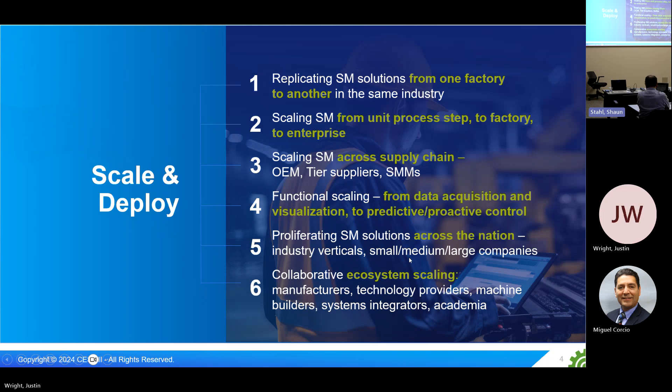So I'm going to repeat this slide because it's important to set context for the rest of the discussion. When we said we're going from CESMII 1.0 to 2.0, we said we're going to be focusing on scaling and deploying. So I'm just repeating what that means here. The one that is important here for this particular conversation is number one, of course. Perhaps number two, this is less of a supply chain - that's actually the next session. It could include functional scaling, proliferating the solution across the nation, and of course always the ecosystem scaling. So a lot of points that apply to this particular sector.

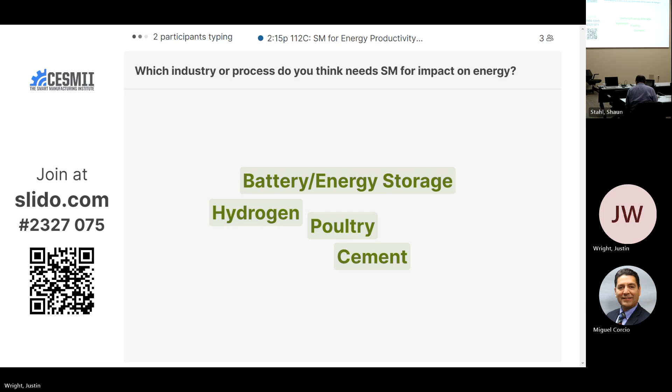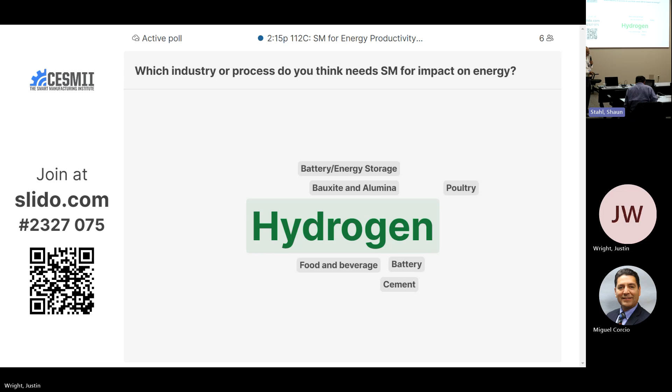Did everybody answer cement? There you go. That's good. That's a new one, poultry. Yeah. Bauxite and alumina, close to my heart. Okay, that's good. Good to know, good to know. And this will be open, so if you think of something later on, you can just add to it. So thank you for that.

So what I'm going to do is go through some examples. I've got maybe ten examples. I won't spend a lot of detailed time on it, but at least give you a flavor for what these projects were, what impact they had in the respective industries. And then hopefully that will give you some idea of how we've been able to use smart manufacturing in these use cases.

So this is a use case in, you could call it, oil and gas. We had project partners from Texas A&M, and then back then it was called Praxair, it's now Linde. They were the partners. We had Siemens as another partner, and other folks as technology providers that came together. The idea here was that the air separation unit is a fairly common piece of equipment in that industry, and a small percentage change in how you operate it results in a huge impact on energy consumption. And so what they did is come up with a strategy where they were using digital twins that were fairly high fidelity.

And then from there they extracted surrogate modeling that could actually execute in real time. Because when you talk about real-time operations, you can't wait for hours for a model to provide results. So they created a bunch of dynamic models, and out of the steady state models, they had real-time applications that were created, and worked in conjunction with real-time access to data from our partners at Siemens. They had a data pipeline that fed through, to compare what the real-time process is telling you versus what they were predicting, and that was tied together for them.

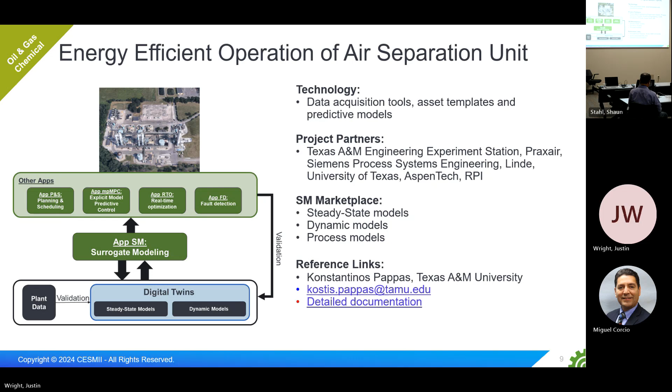I just wanted to add to the next example that you had in there. One of the challenges we had also was that in many instances, you cannot collect data because of the expensive instrumentation that you have to put into the different places. So that was one of the targets here. It wasn't really just get to the energy losses and reduce it, but it was also do it very inexpensively without spending a lot of money just instrumenting all your equipment. So that was the other challenge that we had in this case.

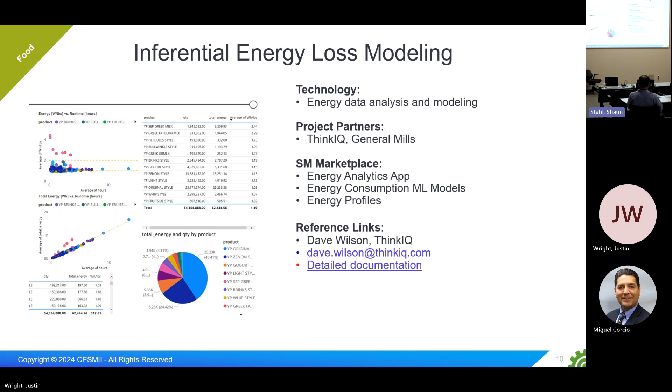Okay, this is another industry. So this was aerospace and pharma, but it deals with traditional subtractive manufacturing, which is basically machining, and additive manufacturing. So this facility at UConn, and the partners were Johnson & Johnson and Raytheon and CCAT.

And here they took an approach that was at a systems level. And they said, here's a flow path of equipment that you have, which has both additive manufacturing and subtractive manufacturing. And then as you route your products through it, how do you then come up with a systems level model that says, in order for me to optimize energy usage on this particular product flow path, how do I do that? So they took a systems approach here.

But as part of that, they did develop things like tool wear estimation models. So as you're doing the machining, now it's able to predict when the tool is going to go out of commission. And then based on the data that they have from these partners, they also created a model that would predict the probability of generating scrap, which, probability of generating scrap doesn't sound good, but it's really quantifying how much of a quality issue you might have.

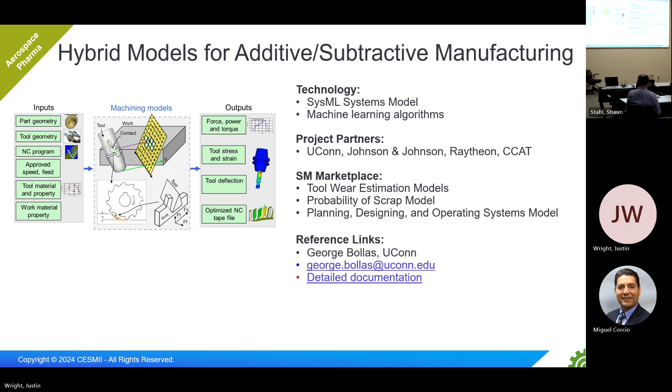Steel is a big energy user, as you know, and in this case Arcelor Mittal, now Cleveland-Cliffs, made a proposal with their partners at RPI, Purdue, and Missouri University of Science and Technology.

The main theme for this project was to be able to predict the quality at the end of the hot rolling process based on what you're doing in the continuous casting process.

If you're familiar with how steel is made, the very first step is where molten metal comes in through these segments and cools down, creating a slab at the end of the process. But it's very critical to understand where the solidification occurs, and that's a function of many operating parameters. There's no in situ measurement that tells you where that solidification occurs.

So Missouri Science and Technology created a displacement sensor that could be mounted underneath one of these segments, and they also came up with a strain sensor that could operate in that environment. Between the displacement and the strain, you could actually predict exactly where the solidification is occurring. They tested that at their site and were happy with the results.

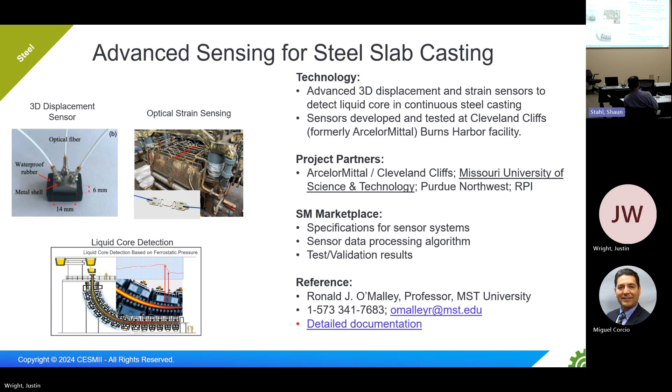Related to that project, Purdue worked on a continuous caster digital twin. The idea here was to get a digital twin that was based on physics, but then matched with real-time data coming from the floor.

They didn't quite finish that second part because of some challenges we had at the manufacturing facility. But nevertheless, this continuous casting digital twin is now actually available, and that was given to Cleveland Cliffs for their maintenance personnel to use.

As part of that, we also asked them to create the information model that would become a profile that goes into our platform marketplace.

This particular twin isn't something available through the platform because of the intensity of the computations, but Purdue, as a partner, is making that available to CESMII members through us.

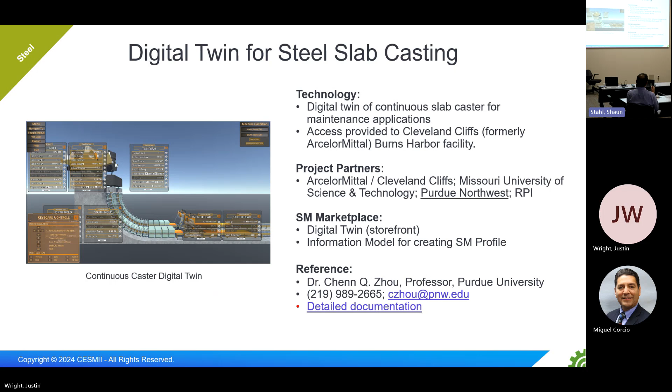The last piece is the clogging predictor, for those of you who have exposure to this. When you have molten metal operations, as the metal flows into the cast, if something happens to the nozzles and orifices that send the metal down to the chambers and it gets clogged, it's a huge deal - it freezes everything up, and the cleanup could cost you anywhere from half a day to two days. Production stops.

There's a huge deal in terms of the downtime, so being able to predict this through machine learning approaches was one of the things this team did. They have a machine learning based clogging detection algorithm using real-time signals from the casting operations, able to predict when it's pretty close to getting clogged. It flags the operator, who can either change the settings or go do something to fix it.

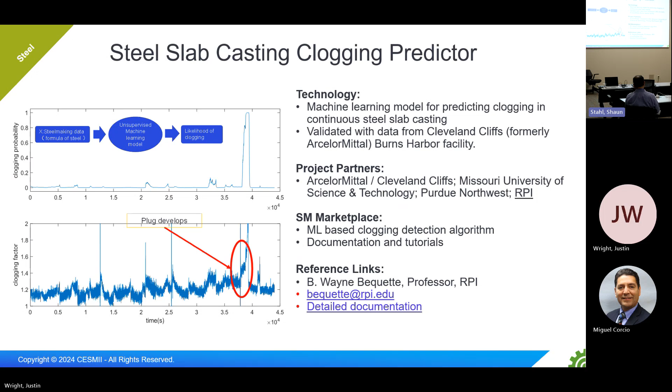So those are the steel examples. Here's the cement example - University of Louisville. Any questions so far on the ones that I presented?

The problem here was that the kiln represents about 60 to 65% of the energy used in cement production. So it's a huge deal if you can change that - if you can cut down by 10%, that's a huge deal. Every cement manufacturer has this.

What they did is they created an almost industrial size kiln, and then they instrumented it. They developed both data-driven and physics-based models for it, and then tied it back into an advanced control strategy.

So you could go from sensing to machine learning models to predictive, physics-based models to an advanced control system. They took that entire package to Argos, which was the industrial partner, and then they ran it at their facility in what's called a shadow mode, meaning this system was running in the background, providing advice to the operators as to what should be done to optimize. In the end, the operators still had to say yes, I accept this or not, which is a good strategy. But they were very happy with it.

So what they've decided now as an extension is that instead of just the kiln, they've now gone upstream and included the pre-calcination process to get even additional benefits in energy conservation.

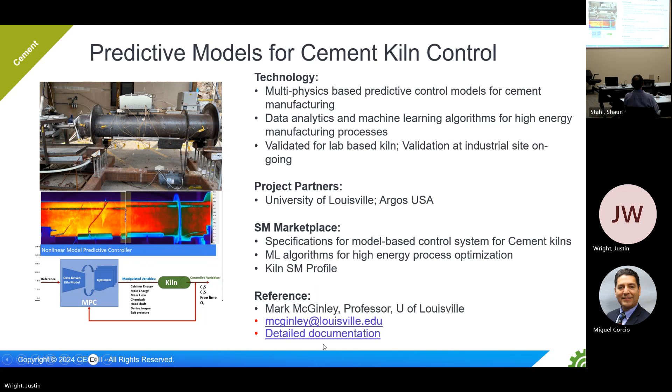Somebody was asking me about, oh David, you were asking me the question about McGinley. So that's cement. This is aerospace and composites.

So Virginia Tech, Penn State, and Honeywell partnered in creating real-time in-process data monitoring for their operations, and again this was machine learning-based algorithms.

The process was chemical vapor infiltration, and that's a pretty advanced process. You don't have a lot of in situ measurements, and to optimize the thermal operations and the furnaces to get to the quality is a challenge.

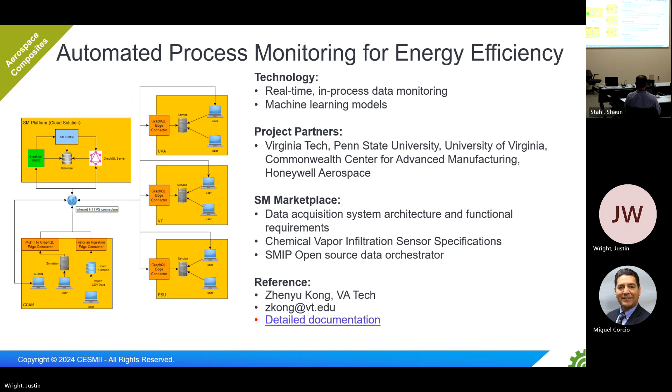So they were able to create a monitoring system. They were able to get the data architecture necessary to capture that data and then create the machine learning models from it. So, another industry example.

This is on CNC grinding. One doesn't think that it's a high intensity energy industry, but these are, I think the size of this, Miguel, remind me, I think it's maybe 2 meters in diameter or something like that.

It's really huge, and to go through the grinding process for some of these large components is an industry sector that's of interest. So here again, they created a hybrid model, with physics-based approaches as well as data-driven approaches, combined into a dynamic control strategy, and then predictive models available for us, physics-based models available for us, and obviously a profile created for the grinding process, made available for other members.

You're also looking at the other end of this as near net shape manufacturing for large products like this. So the machining of that is limited there because you're creating near net shape. What are the lessons learned from that that can be used for near net shape? So you should talk to Nick Nelena to see whether he needs any of these, that it can work for him, and there's a potential for it.

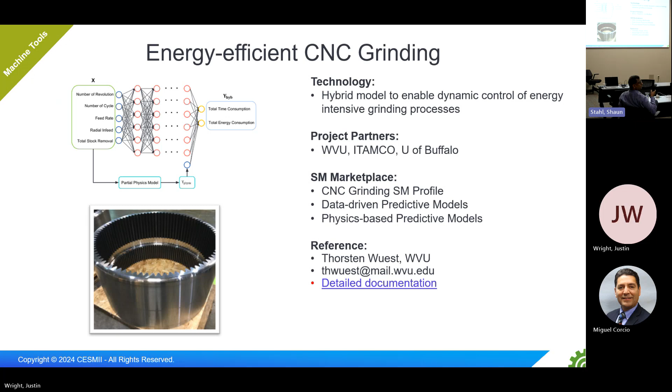This is again Honeywell as our partner with Virginia Tech. This is another phase of the project where they looked at how, actually one of the unique ones here was that when you have discrete parts being processed in thermal operations, it's important to know how these parts are placed in the furnace and what is the optimal location for that. So if you're in the aerospace industry, this is a common challenge.

And so they came up with algorithms to optimize the location of these parts as they're being processed so that the quality remains the same, but you end up using less energy in the thermal processes. So there's a part loading optimization piece of it, load placement. And then even for the thermal operations, what are the optimal operating set points for creating the required quality. So, another example there.

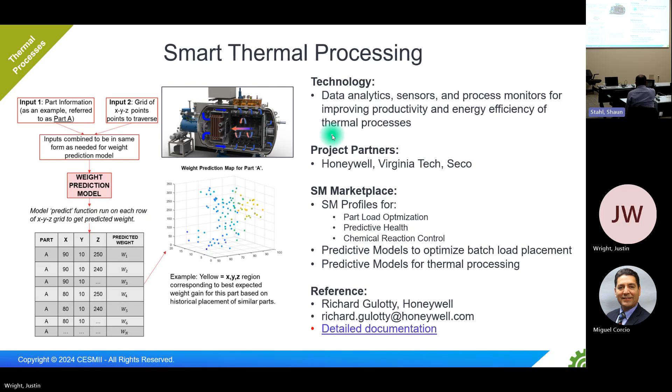Pulp and paper, Auburn and Rayonier. I actually talked about this example elsewhere as well. But they, in the washer process - this is the pulp washing step - if you have a sense of how much air is entrained in that pulp, you can actually get a better sense of how to operate the equipment to optimize.

But there's no in situ measurement available for that. So what they did is they created machine learning models that would look at everything around the washer that can be measured, all the operating points, all the information coming from other sensors. And then they created a machine learning based algorithm that would provide soft sensing of the quantity of interest there. So this brown stock washing process step is very common in pulp and paper.

In my other presentation, I said they reduce defoamer, which is something they use to balance the consistency of the pulp. But the defoaming agent is not necessarily the best thing to use from a sustainability standpoint. So this cut it down—Miguel, remind me—I think on average it was like 36%, but they went as high as 60 or 70% reduction in usage. Again, from a sustainability standpoint, we're trying to see how these smart technologies can make an impact. The data-driven models, the algorithms, and the soft sensor for entrained air are the key things here.

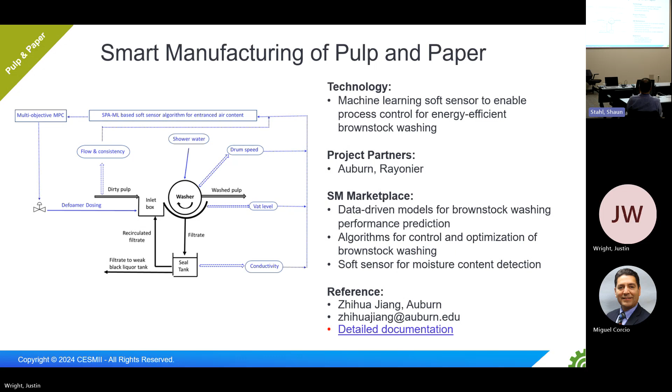They worked with Rayonier in the beginning, and then we extended the project to try this out. To some extent, they've done a little bit of scale and deploy with two other companies—International Paper and Georgia Pacific in particular. So they're actually finishing up the project now, wrapping it up.

This is for agriculture—the hop drying process. This particular team worked with 5 different hop dryers in the Pacific Northwest. Hop drying is a fairly old, uninstrumented, unsophisticated process in terms of control. Typically the set points are just determined through historical knowledge, and they're not necessarily optimal. So they instrumented some of the furnaces and then created predictive algorithms that would tell them what is the optimal time to set the furnaces for, and at what temperature, without wasting energy.

I think it was only maybe a 20% difference in energy usage with and without the algorithms. I can go back and check, but I believe it was about 20%.

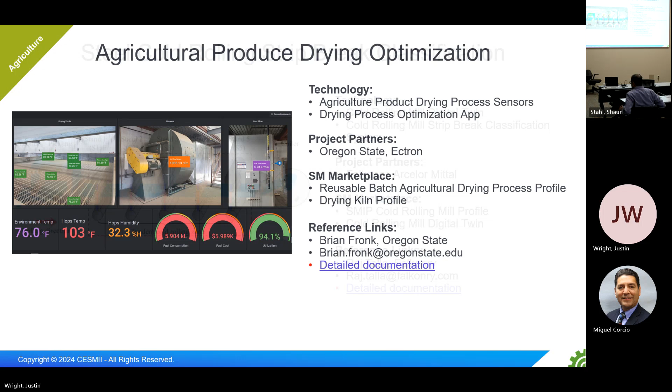I have maybe a couple more of these, and then we can have a discussion. This next one is again with the steel industry. This was more of a method to classify strip breaks, but done in a fashion where it becomes predictable—so you could monitor operating parameters in real time, run the algorithm, and predict if a strip break is going to occur. Strip breaks are a big source of downtime for any rolling operation. This was tried out at ArcelorMittal, and Falkonry was the technology provider. It's for steel cold rolling, but since I came from the aluminum industry before starting with CESMII, this is very relevant to any metal rolling operations.

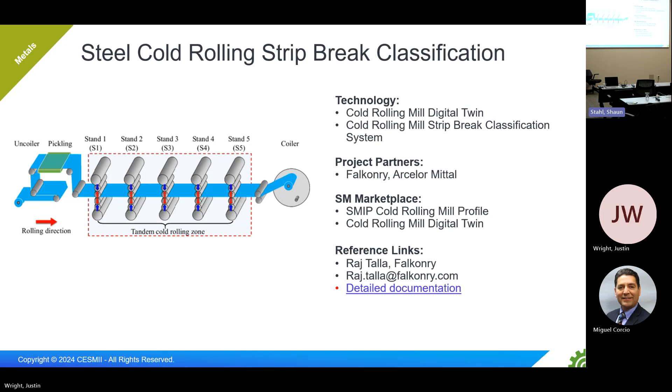The last example is actually the only one within CESMII that touches upon clean energy production—we'll admit we haven't done a lot in that area. This one is more to do with inspection, automating the inspection process through advanced technology like augmented reality, and the difference it makes in cutting down inspection time and rework. This was for windmill blades, with GE Renewable Energy as the industrial partner and Spiral Technologies as the technology provider.

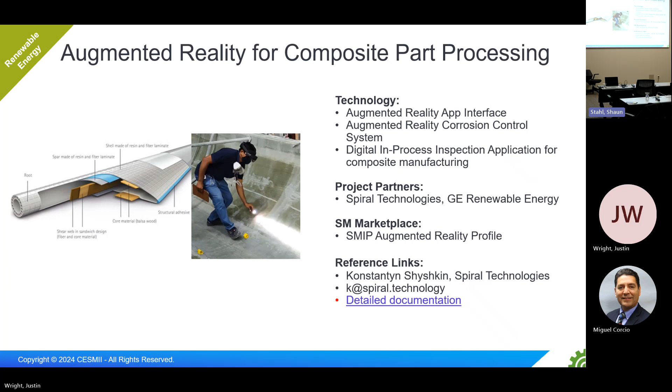So on our website—okay, go back a little—these are just a few examples of the projects, and they're all more or less related to energy. On our website you'll find more detailed descriptions of all the projects we've done. Feel free to take a look and see if you're interested in responding to our RFP; it might be a good idea to do that. There's a lot more detail on each project available there. Outside on the front desk there should be brochures with 2-page documentation giving an overview of each project if you're interested.